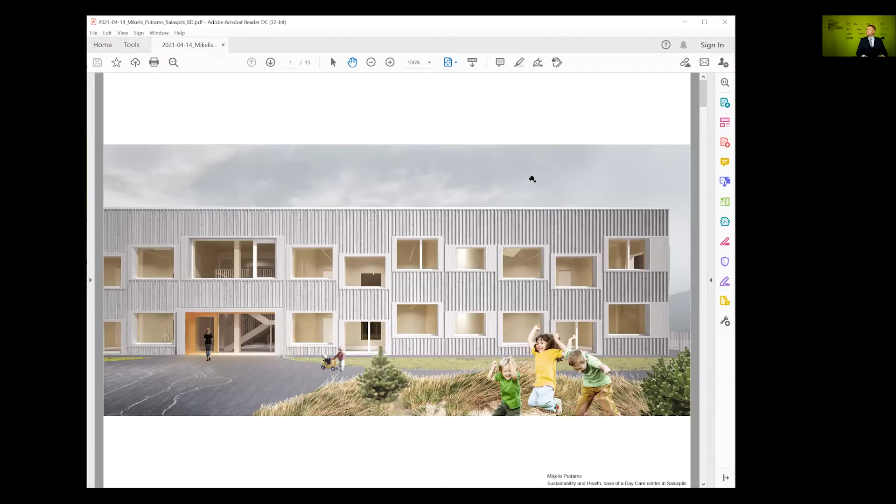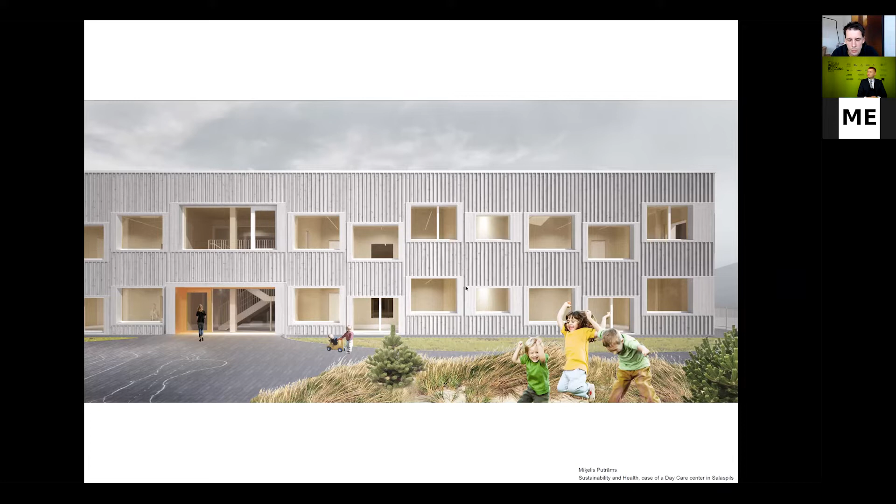We've always been interested in those three basic quality elements that are asked for in buildings. I mean energy efficiency, low carbon materials, and a healthy environment for people. And with healthy, I mean not only healthy for people, but also healthy for the planet. As we know, we have this relationship with the planet that we sometimes forget.

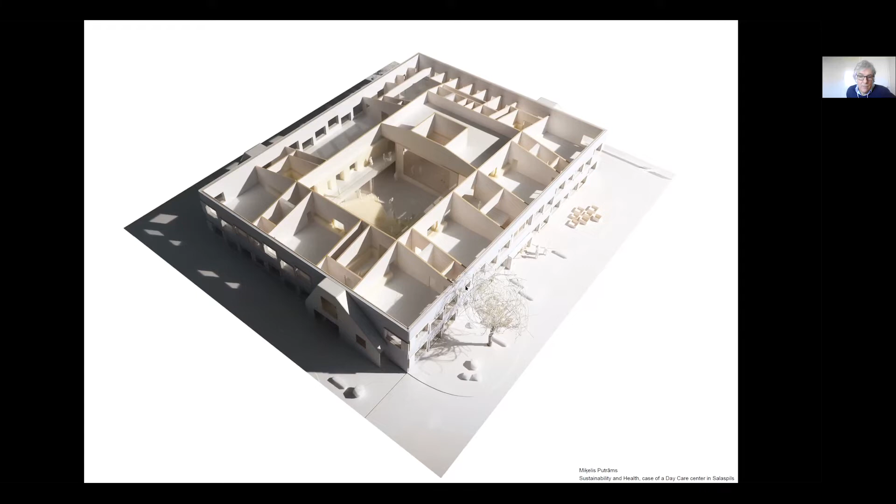When we started the project, we were faced with those challenges, and we are quite sure we can't really build buildings as we did 20 or 30 years ago, because we have this future facing, and listening to Paul and all the arguments, I see that this project somehow relates and gives some ideas to the goals of the Green Deal.

The building itself is quite interesting in that it tries to answer the questions and needs of the client. The client is Salaspils municipality, quite close to Riga, with a lot of new families and new people coming to this area. So they need education for small children, kindergartens, preschools, for a lot of children. So the building is for 12 groups, and it's quite a large building.

We thought that this sort of kindergarten machine should also be healthy for personalities to develop. So we divided the flows of people into 6 entrances. At the same time, we created a central gathering area, a space with an amphitheater and a stage that will be a common area for social interaction, for communication, and a place to learn to make healthy relationships. And I think everybody will agree that in these COVID times, we're longing to see this in reality.

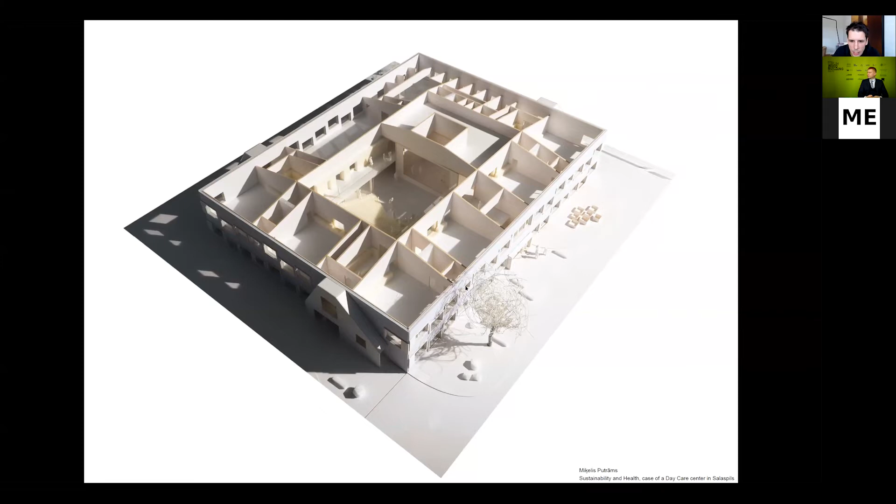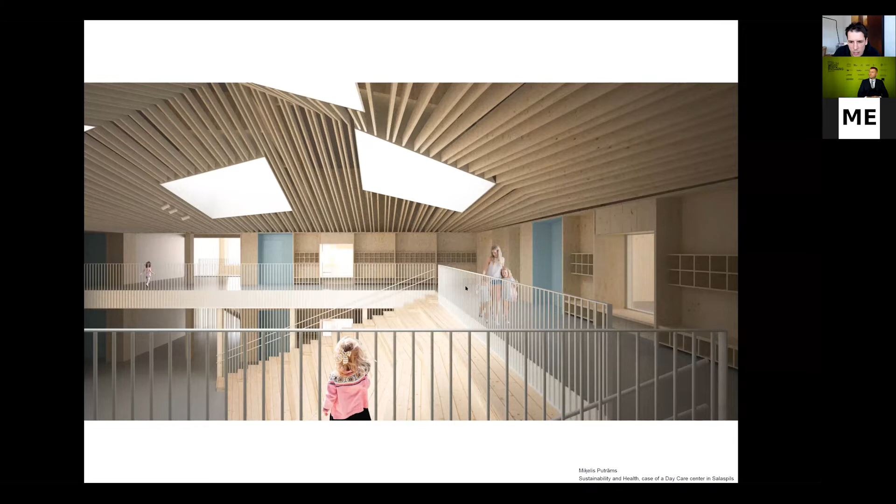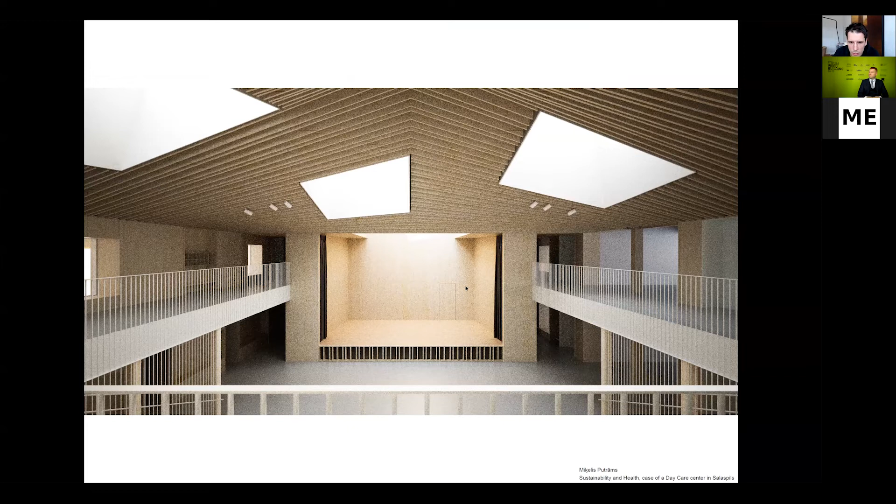We also understand that this new kind of typology for education buildings faces some architectural and engineering challenges, and this could only be realized with a very supportive and integrated team. And for this project, I should admit we are lucky, and we managed to get to this architectural quality, and also to the beginning of the realization of the project.

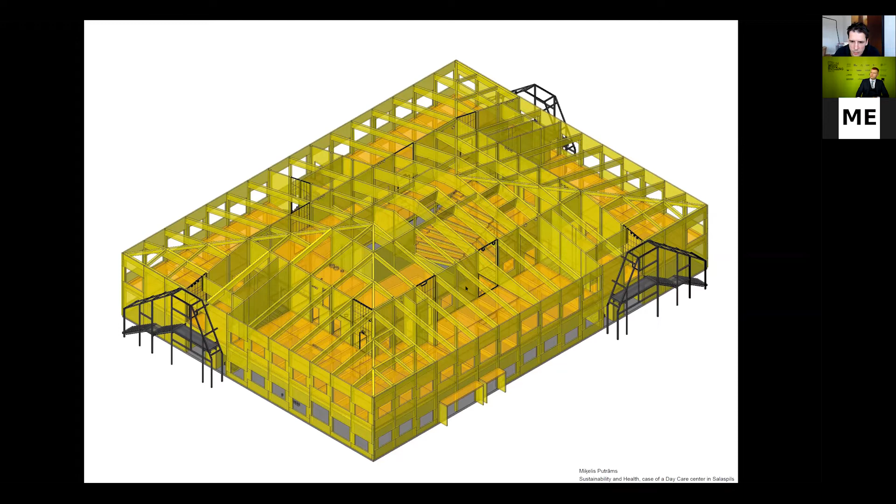And the problem with this concept that sounds very nice and progressive is that at the moment we're not allowed to build this kind of building in Latvia. Basically, the fire regulations are the most challenging obstacle to building timber buildings in Latvia. We created an evacuation strategy for the building, and this strategy was presented to the technical committee of the fire department.

At the beginning, we thought it was going to be an easy process, but it became even more time-consuming. But it was very interesting because for this project we were cooperating with our team and with specialists from the State Fire Department. And we designed the building together. We were discussing, changing solutions, testing solutions, making simulations of the people flows, making calculations for the fire resistance, and putting all the concepts together

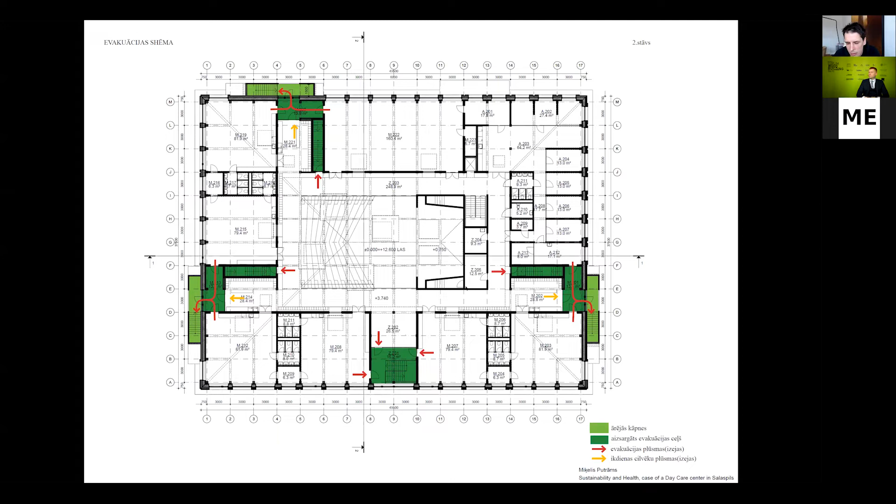mainly to create new quality requirements for the safety of the people, for the health of the people in case of emergency, so that we could use timber as a material, but have the safety requirements met even more strictly than regulated in the existing norms.

The main aspect was the question of evacuation of the people from the house, the evacuation of the children, and also the evacuation of children with special needs, because that is the most important part of the fire rescue service. And unfortunately, this evacuation time is not even expected to be calculated in the building norms.

So the building norms are outdated, but we were opting for a very efficient evacuation, and we were also looking for the experience of other projects in Nordic countries, where we find this very clever way of dividing flows and providing the entrance to the second floor through the exterior stairs. And not only for the fire rescue, but also for the regular access to the building, we find the solution very useful, because we were able to divide the flows.

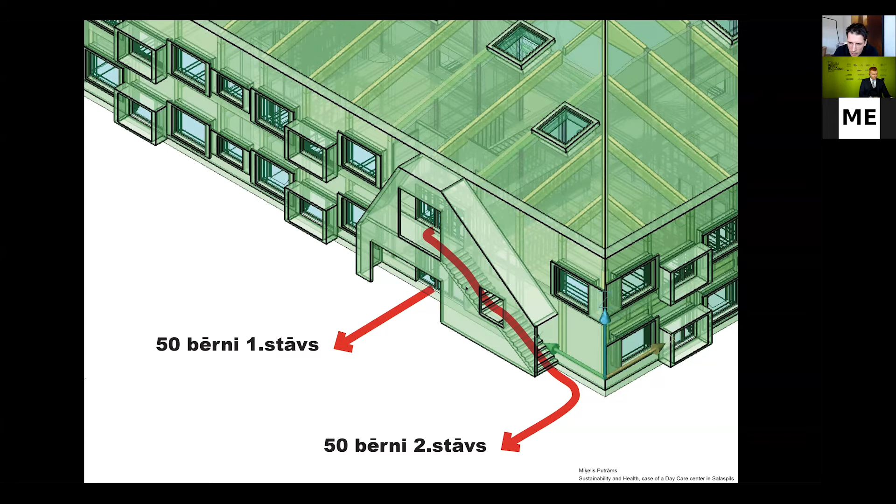So I should say one more time, this was only possible due to the fact that I have support from clients, support from Wood Construction Cluster, very supportive and competent team members of structural engineers and fire engineers. And lastly but not least, the very supportive attitude from the State Fire Department.

And this is, I mean, this is not the right way to build wooden buildings, but at the moment in Latvia this is the only way we can start developing these Green Deal concepts, because otherwise we can't trust the norms. We have to move faster than the norms are developed.

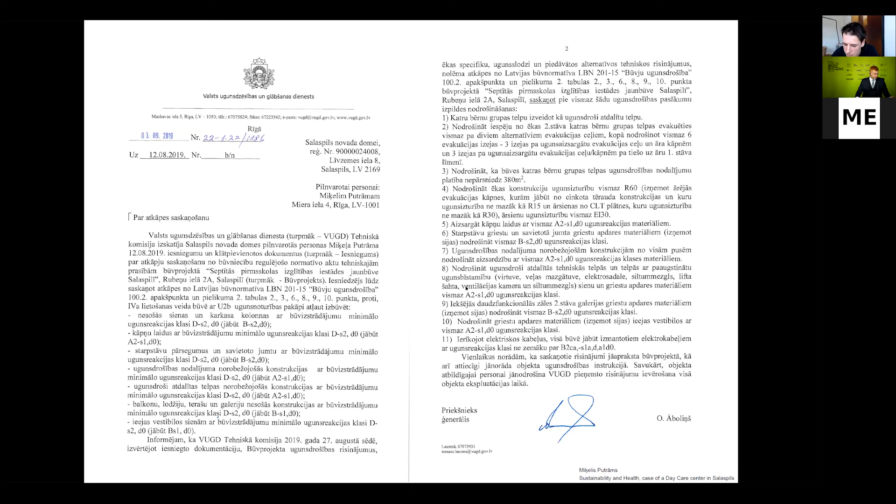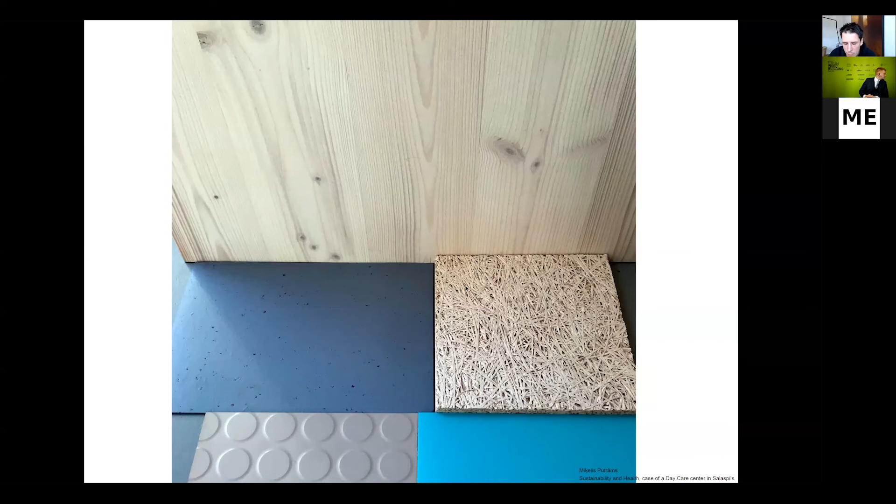Regarding the healthy indoor environment, I think we also value more the quality of the environment within the rooms during these COVID times. So we very carefully selected the interior materials. We selected local materials. We selected materials with minimum toxic, or even no toxic things inside the materials, or minimum VOC emissions.

And then we also have only eco materials for the wood preservation. I mean the oil varnish, the linseed oil paints, and Swedish OrganoWood protection for the facade. So this is part of the idea that the timber elements in the house shouldn't be toxic. We know that usually timber has to be protected in some kind of way, and then if we end up with toxic waste, it's totally not healthy for people and planet as well.

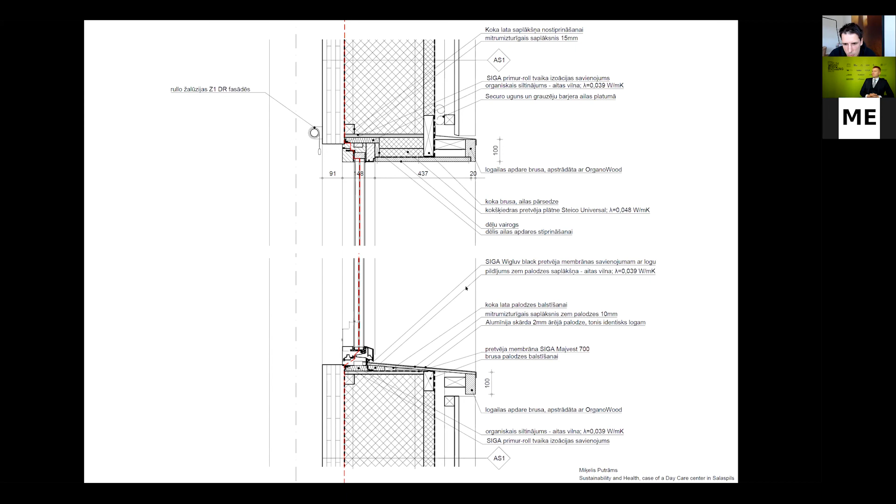Also for the interior environment, we were able to implement German passive house technology, and that helps us to provide a better indoor environment regarding the temperatures and the air quality. And in this project, we have a lot of exposed timber elements in the interior. And due to the fact that it's eco materials, we also have optimized air changes in order to provide optimum humidity levels during the winter.

At the same time, we also have preheating and pre-cooling of the ventilation air, and we hope that this will allow us to provide an excellent climate within the rooms.

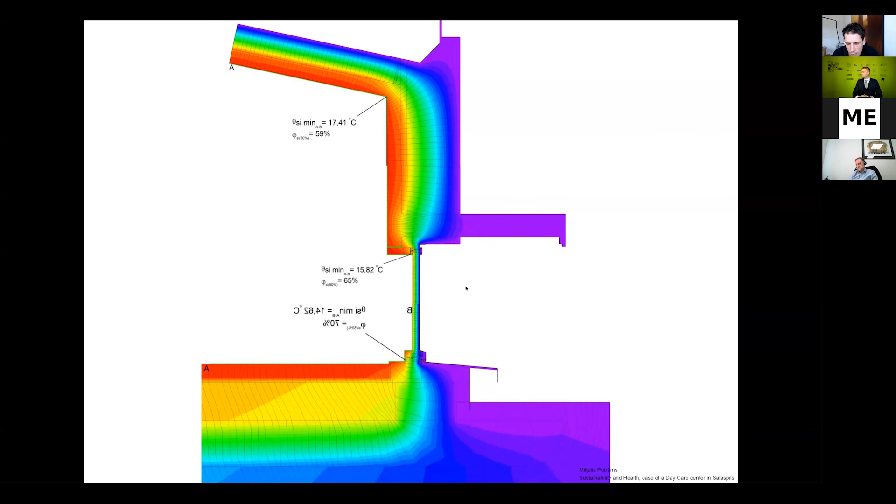But I think that for the next conference, the project will be ready, and we would be able to evaluate the result. And I hope this was interesting, and I'm looking forward to realizing this project.